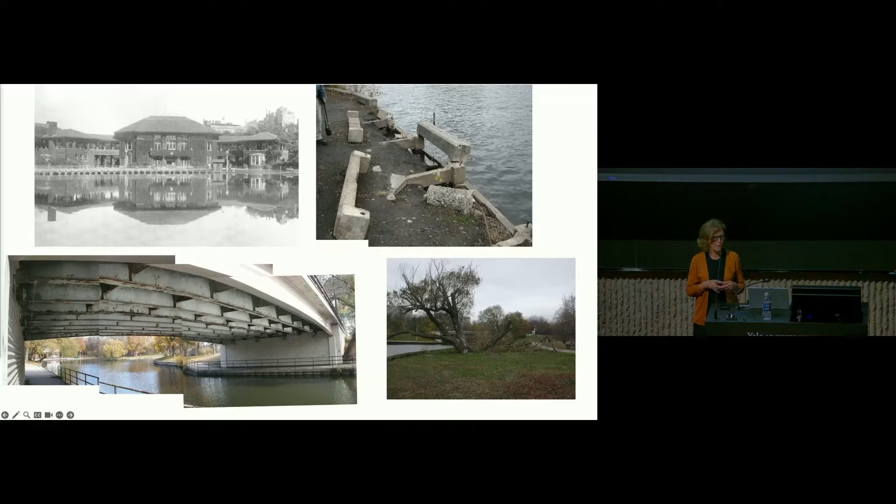This is really part of a zoo with no cages. We really wanted the animals and the people to mix without barriers, just by inviting, by having the right habitats, people will come. So starting out, we have a pond, a remnant of the 19th century, where water is thought of as more of an aesthetic introduction into the city, reflections.

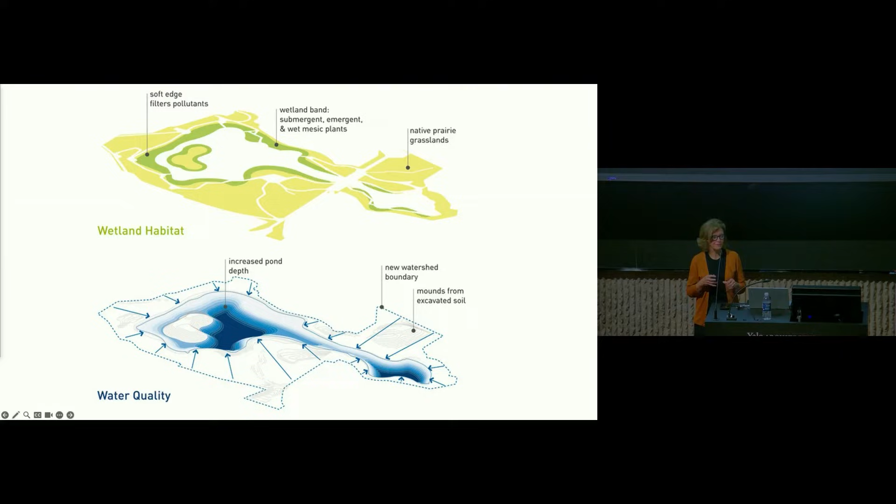And when we came into this project, the zoo had already - it was a bit run down. The project ended up being about making a place, instead of repairing the edges of this pond, really ripping them out and creating a deeper pond that could support life. And so in this project, over time, we've seen a real increase in the amount of biodiversity it has.

Wood as a material was very important to us, to do something that was renewable, and to create urban space. It's like a new overlay on this 19th century urban space that provides new opportunities for using it, for connecting to people. And of course, we did design a pavilion with these bent wood lamellas that houses a lot of different things that we never expected.

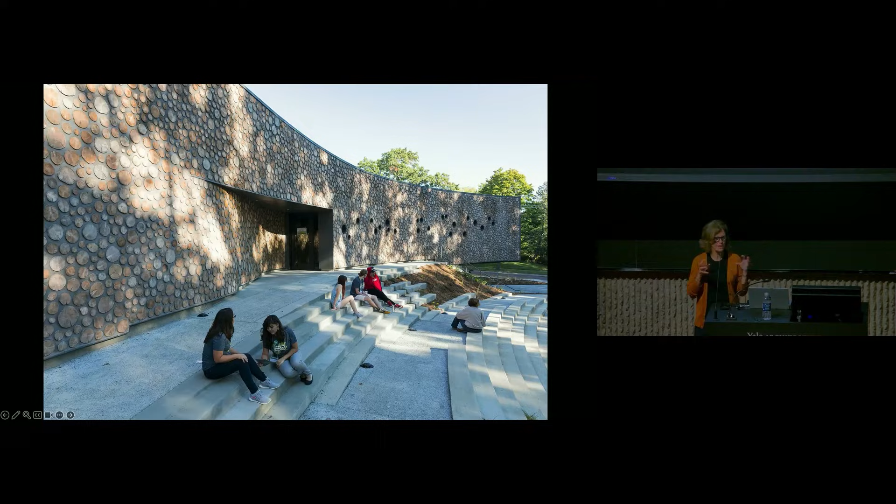So the result is this incredible, almost living wall that's sequestering carbon within the wood. The wood actually is the carbon, in fact. So it's a great way to reduce embodied carbon in this type of building.

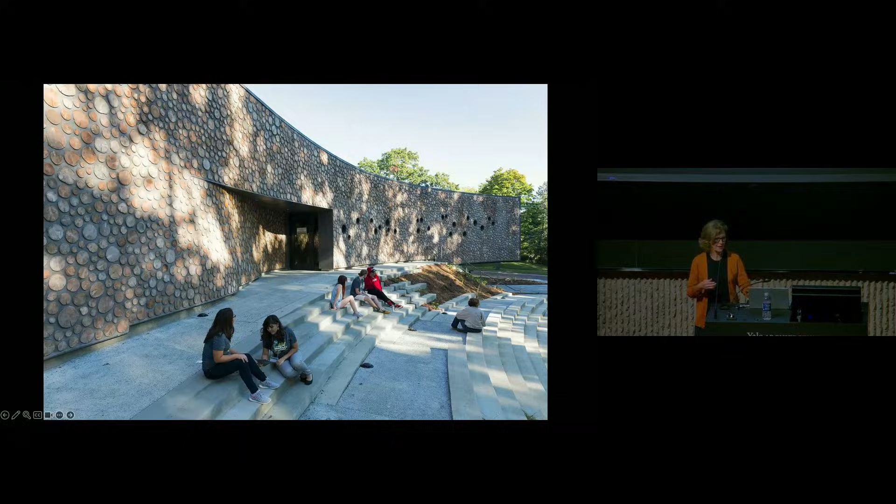Inside it's very light and really feels modern and contemporary, but outside it can also have this aging appearance, a response to the environment, and be a long-lasting building.

The way I started to first think about grafting goes back to 2012 with this project, the Prentice Hospital. It isn't really a project, we were never given the commission to do this. But sometimes as an architect, you just have to do things that you want to do, and you don't have to have a client. That's the example of this.

It dawned on me that we were trying to reuse materials, and it was very hard, like in that Ford Calumet project. It's very hard to get materials that have already been used for one thing and reuse them in a building, because you have to have those things tested. You don't know what's available. There are ways to do it, but it's a chore. But buildings are already there, so they should be easier to reuse.

This building, designed by Bertrand Goldberg in 1975, was a really cool looking hospital in Chicago, with these oval windows, and the design of it is kind of this cloverleaf. And it was going to be torn down. It just seemed like such a waste, because it would just be the coolest building, and it could be anything.

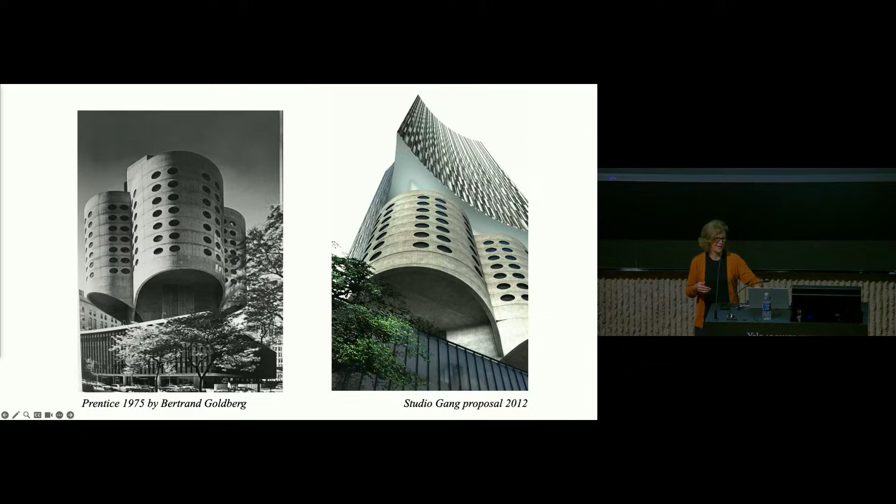It was technically possible to show this, because Bertrand Goldberg, when he designed the building, did not put a core down the middle. That's because it was a hospital, and he believed the nursing staff should be able to see all of the patient rooms. So the nurses' desk was in the middle.

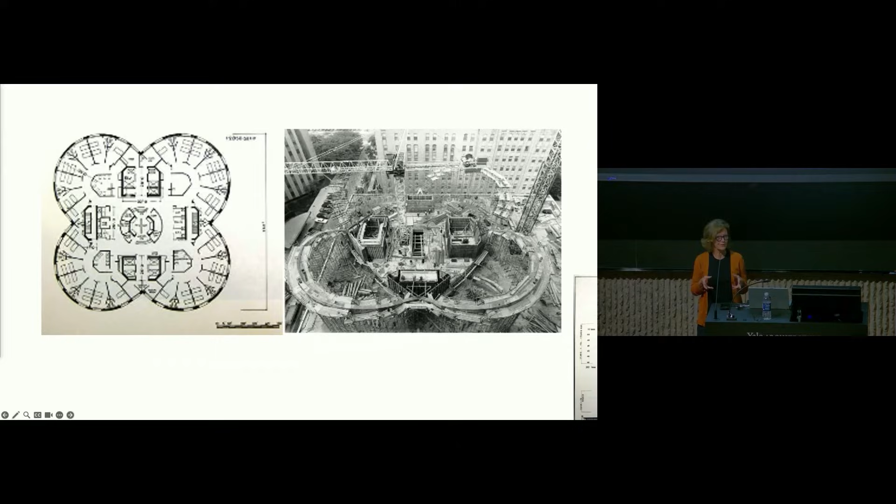But what this did was actually make it possible to imagine dropping a core down the center of this thing. Yes, that's why it's not preservation, because it's not really in keeping with the original use, but it would be a way of adding capacity to the site and keeping the remnant of the Bertrand Goldberg building that so many architects like me loved.

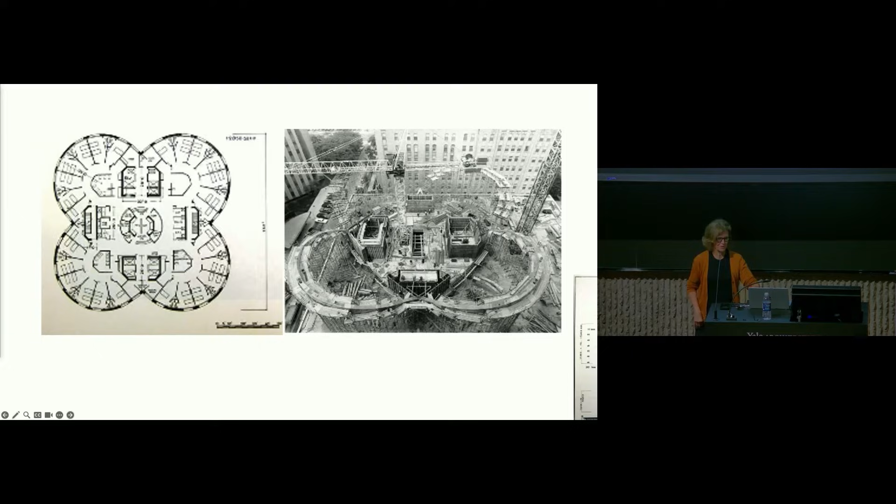But anyway, they got it down and built a glass building over there. However, it did start me thinking more seriously about what reuse is.

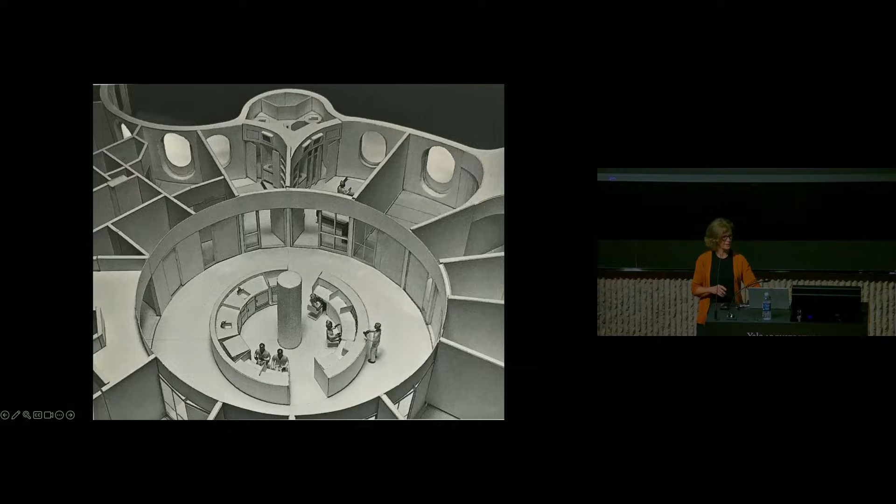Something like design for disassembly might save carbon, but it's not going to save the carbon until that next building comes and gets disassembled. So this is about the emergency of saving carbon right now, so delaying building. But the second best one is increasing the intensity of use. In other words, not just reuse, but amplified reuse: making buildings work 24/7, making buildings have more square footage, making buildings have more uses.

And so this led eventually to this book, which talks about the art of architectural grafting. And why grafting, why horticulture as an inspiration? It's an incredible thing. I've always been interested in plants, but grafting has been around for so long. It's an ancient technique where there's a rootstock and you add onto it this scion, which brings new qualities to the plant. It's not about sexual reproduction, it's making the two plants work together as one, but they stay independent plants, which is really interesting and made me think of how we as architects might add on to buildings.

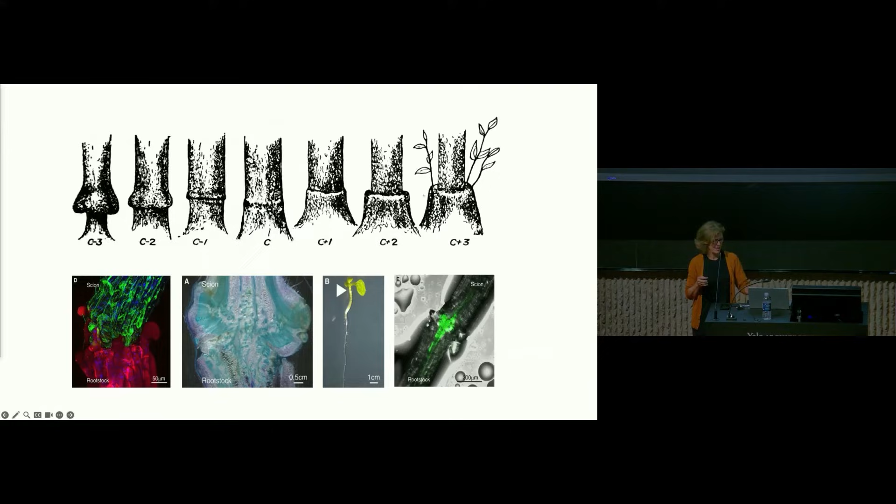This is the kind of stuff that was inspiring me to run a couple of studios on grafting. We've actually done grafting in these studios with plants, and it's interesting to see the other aspect of it, which is the care it takes to actually get the plant to survive and live. It's not that easy, so it's very interesting to see which students care for their plant and which students just kind of put it on the desk and let it die.

But what is architectural grafting, really? I'm trying to evoke a philosophy about upcycling buildings, making them have more capacity, taking old structures, which would be the rootstock, and bringing new life to them that brings an advantage to both, creating a new, distinctive type of architecture.

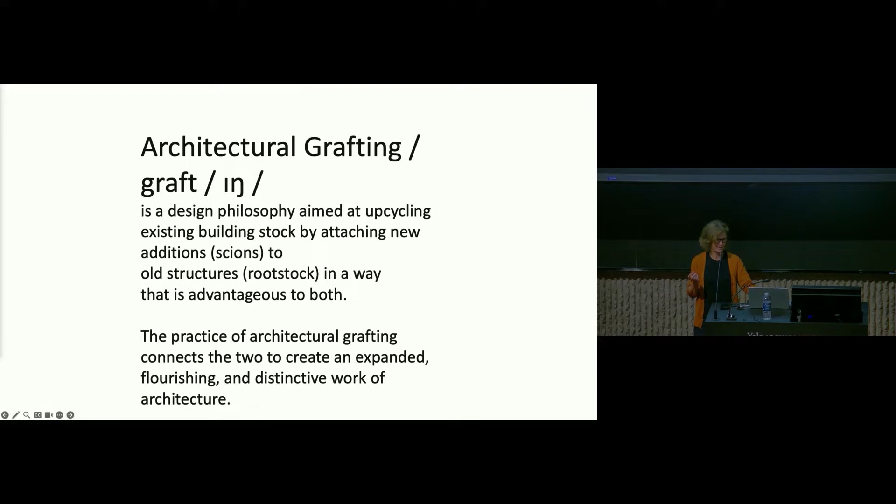In the book, I tried to put out some rules, to be added to or shot down, just some qualities of what good grafting is. You can't just graft anything to anything and expect it to work. There was a lot of fear about grafting in the past because people thought it was impure, but you do have to find things that are compatible for it to work.

That's also interesting—just tectonically, let's talk about that for a second. There's a physical connection that has to be made. I was experimenting with this very banal building we were given as a project. There were about 6 of these buildings on this campus, and they wanted to turn this one into a lab, but it was kind of just a storage building. So you really have to start out assessing what you have.

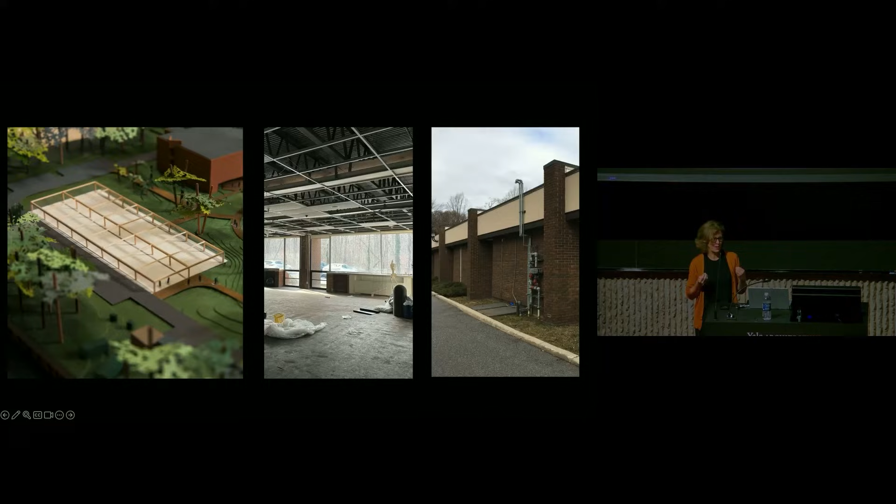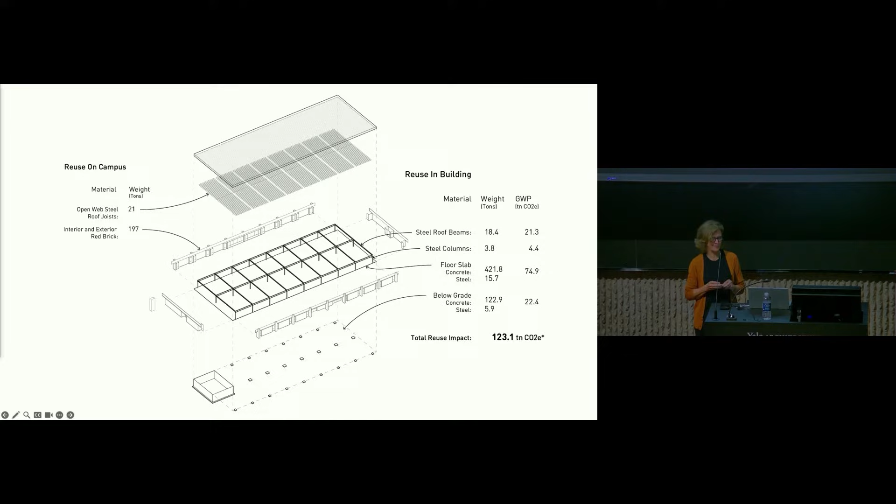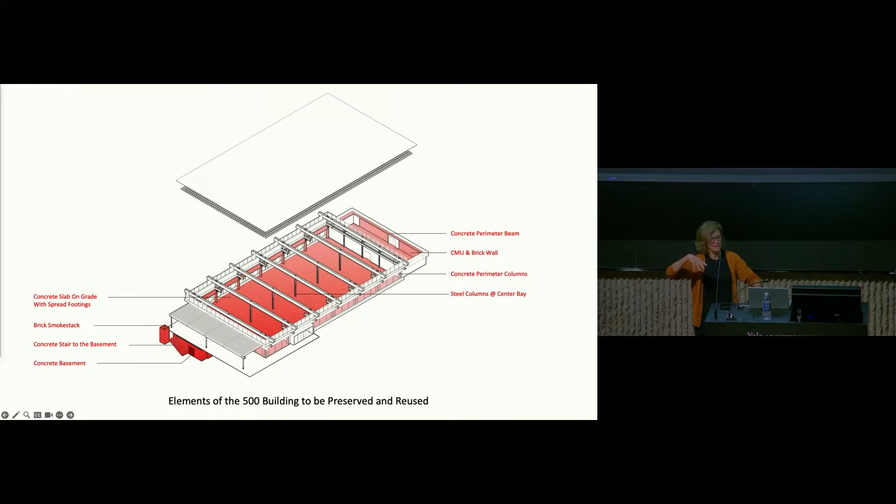Start with what's there. Really understand what can be reused. Most of the carbon, of course, is in the structure, so oftentimes you can pull something back to the structure and you're still saving a lot of carbon—just use that as a starting point. You do have to quantify and assess what will be reused. In this case, we were turning it into a lab and needed a higher ceiling for all the exhaust, but also to bring in some natural light.

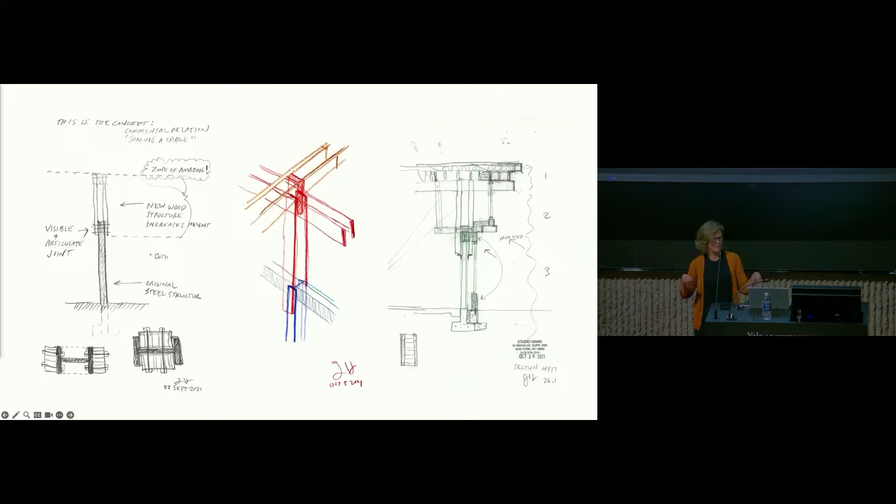So working on this idea of the saddle graft, which is where you cut the living plant almost like a clothespin, and you put them together like that. So that was our concept of how to add on to this anonymous structure.

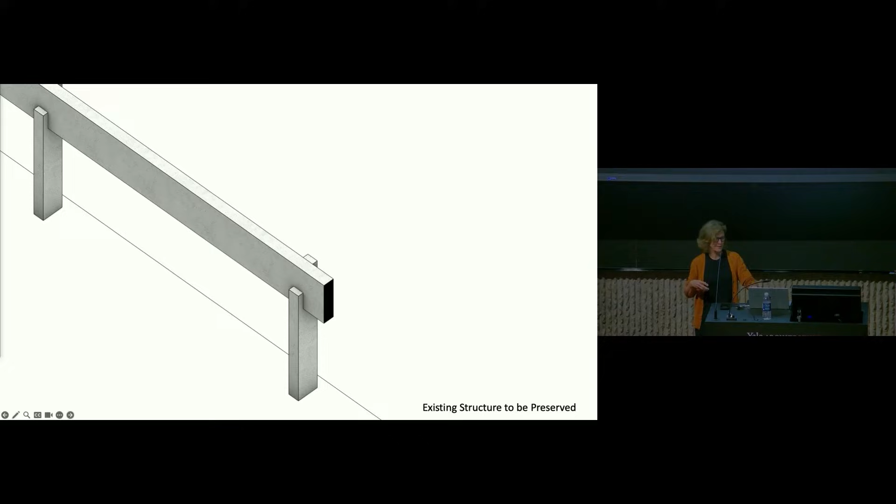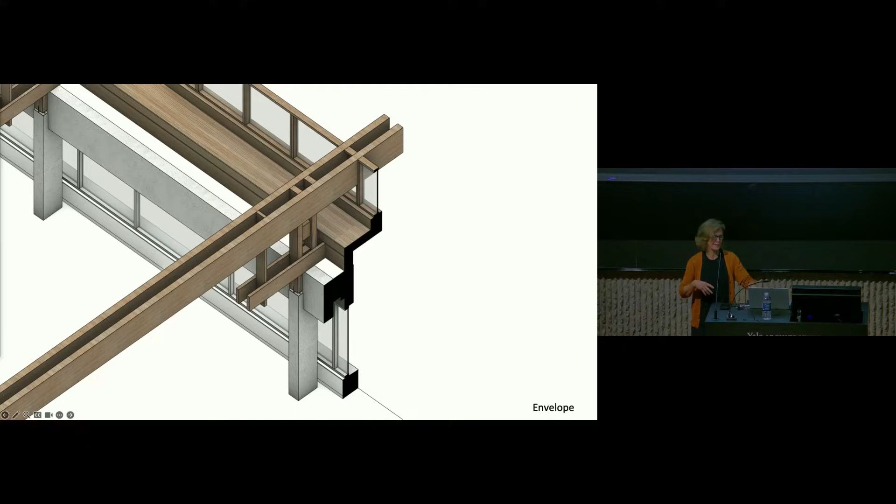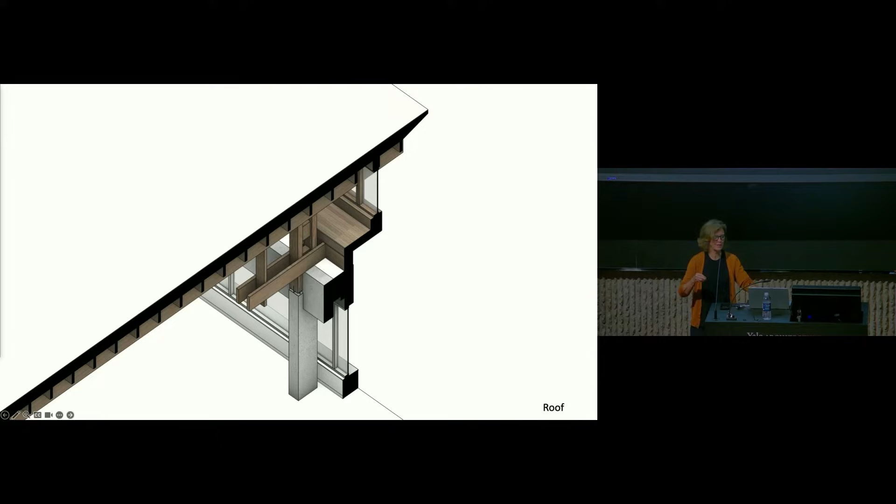Basically starting with the existing columns and beams that were there and bridging up with the saddle, building onto it with wood, which also has lower carbon, creating an assembly that helps create this new, higher plane of the building, making possible this higher and better use, upcycling it. These beams are cantilevered off the existing column lines and beams, like a beamlet.

So together it ends up being this interesting connection, stabilized through the saddle graft. And then inside it would look like this, with a much higher ceiling, and outside a new aesthetic. It doesn't look like the old one, but it's based on it, so it's somehow connected to it, and creates a new piece of architecture.

Another category we had been working on is post-industrial, reusing big old industrial buildings and bringing them back into the urban environment. At Beloit College, we had the chance to work with an old, formerly coal-burning power plant that is positioned right in between the town and gown.

It was a powerhouse that was built over the years in different stages, and then we connected it via this bridge to the campus, making it almost like an accessibility machine to bring people down to the riverfront.

Inside you have this old boiler room and turbine hall, a building so much bigger than you would ever be able to build from scratch. So it has all these great qualities, and we put into it classrooms and recreational spaces like this new practice area, a track that pokes into that, and a pool.

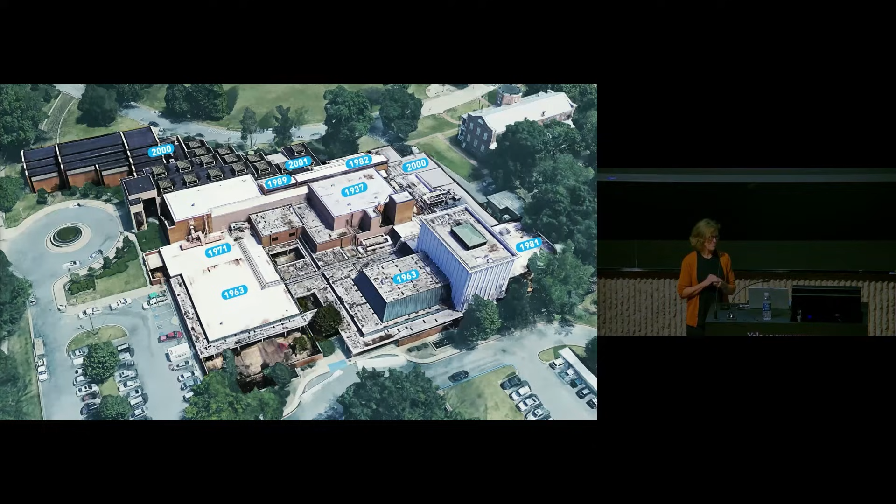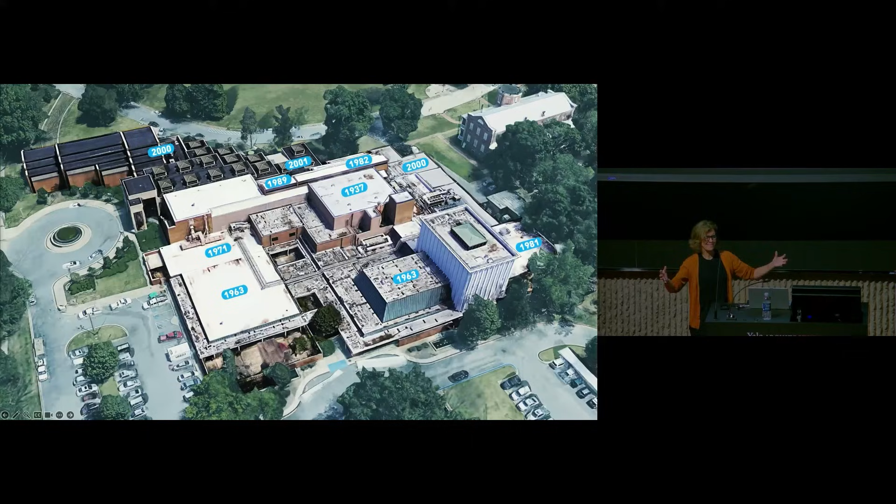This building had all these different parts, and the original building was here in the middle, from 1937. They had just built right on the front of it, every possible shape, every possible material. There were something like 8 different structural systems, 8 different mechanical systems, and the art path was often crossing over the public path.

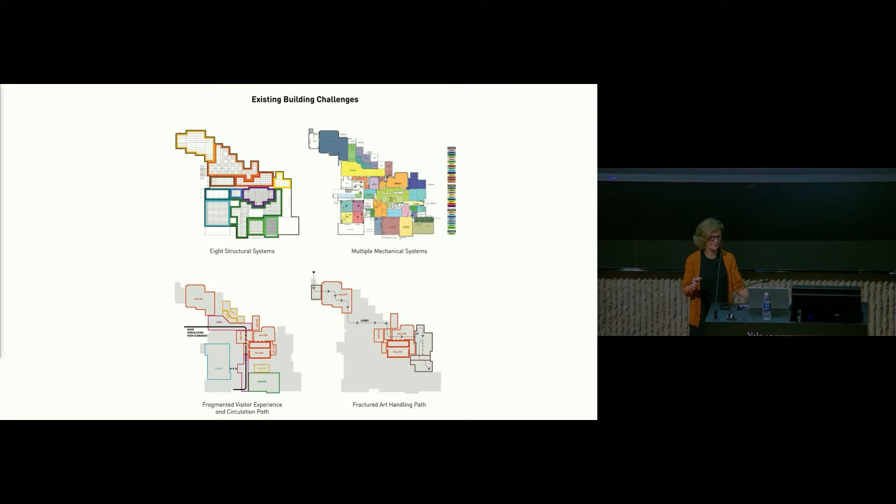So sometimes it takes some scraping away or some editing. The point is you want to give more life. Just like grafting in plants, the goal is the life. So if it has to bust out of what was there, you have to do it.

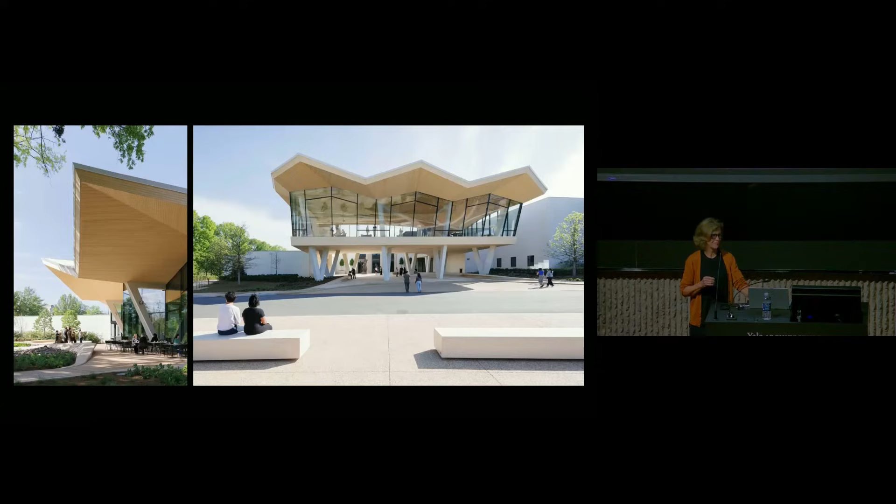At the same time, restoring and scraping away the buildings that were glommed onto the original front building, bringing that in to become the entry once again. And here is the back, where it just blossoms out into the park and creates a lot more types of uses and engages with the park.

There's a little bit of a transformation you can see with those.

This building was completed right as construction went all the way through COVID and opened up afterwards. People were so excited to go to a new place. This is the cultural living room, a place for people to talk about what they've seen.

They just didn't have the social spaces that they needed for people to connect. There's an axis where all of the different programs can now be connected through the blossom, as we called it, and a lot more sight lines between people, and between people on the outside and people in the different programs.

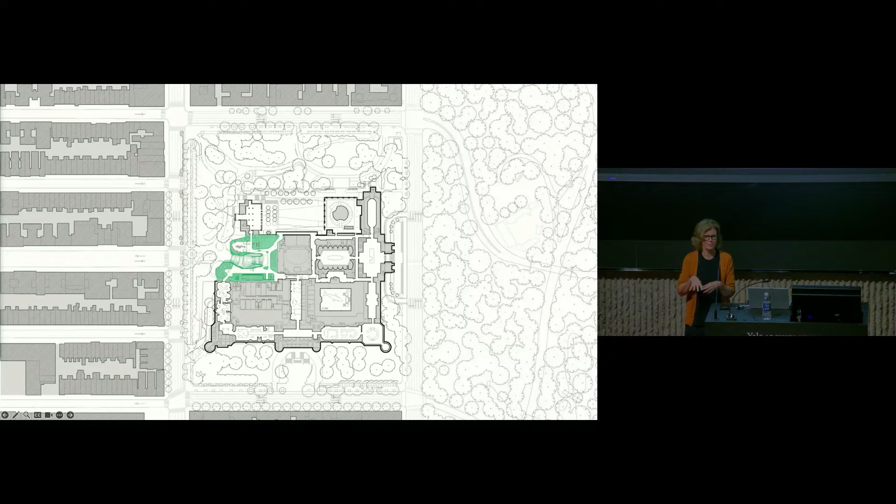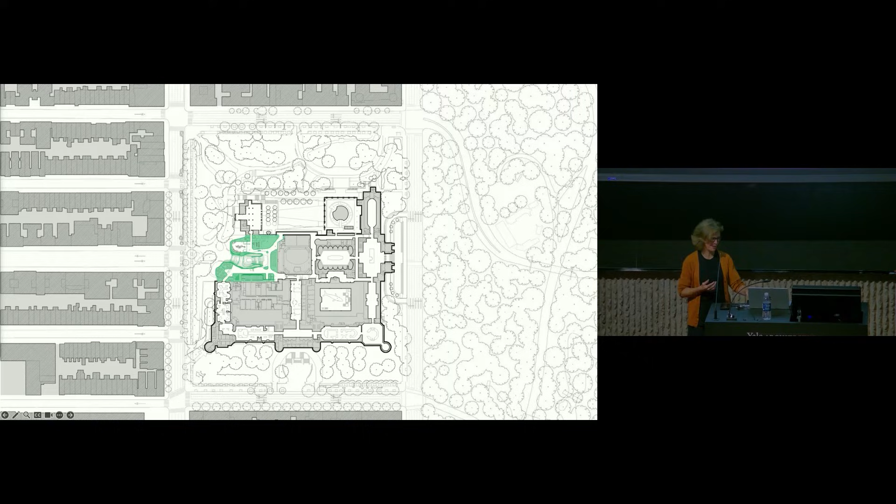We were building, because of putting it here, right on top of the loading dock and loading zone for the entire museum. They have—I don't know if you've ever seen the big whale—and they have lots of big festivals, events, and galas, as well as big giant dinosaurs coming through below. So you could only put columns down in certain areas.

So that inspired this idea of making an inside architecture, something that's a solid and a structure that would support the floors coming in, framing into it. It's hard to describe this project—it is a structure inside that then supports the building all around it.

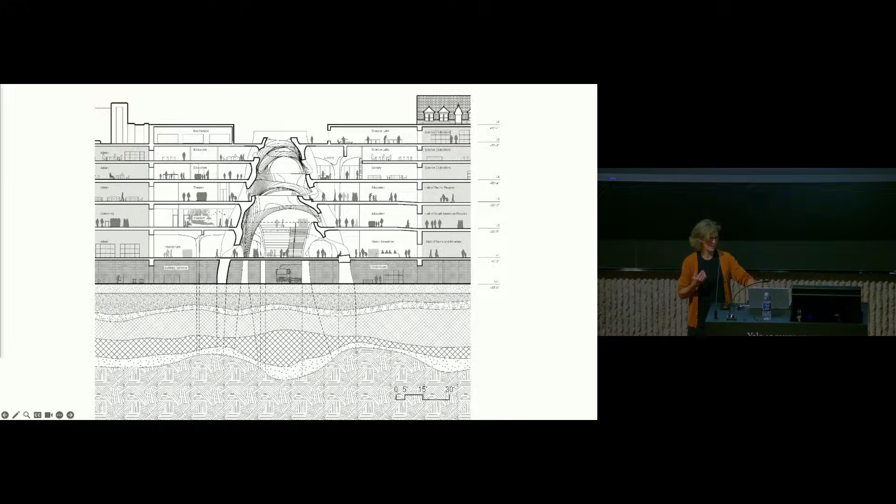Because of these constraints, it really brought to mind these landscapes of discovery—these places where the material, the mass, has been eroded or subtracted, leaving fewer points to land. If you were to look at it as a drawing, this is the kernel of the project.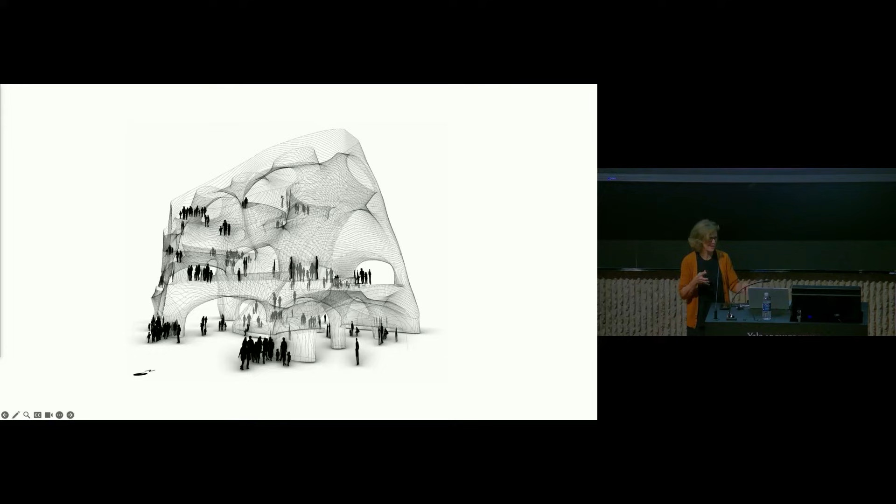This is the architecture—you'll never see it like that, but it's inside the building. This is some of the modeling. We had to come up with a lot of interesting ways of modeling this building, and a lot of the software we tried to use was creating too blobby of shapes and things like that.

So it is also about the form. The creases were important. The aesthetics of it, as well as the technical side, were very important to get this discovery.

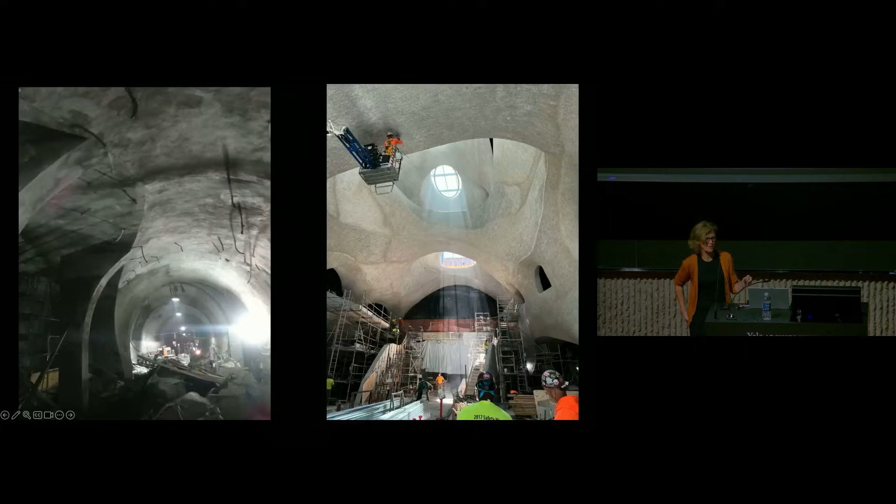And then it became, how do you build it? On the left is an image of this tour we did of the underground in Manhattan. You can see it's almost like a cathedral under there, with these vaults and stuff where the trains go through. It's all made with shotcrete.

In other words, they put the rebar in, and then teams go through and shoot the concrete into the rebar, and scrape it into the rebar. So it's interesting, for someone who loves making stuff, to have a process that is both digital, at the highest end of that technology, but also handmade in a certain way.

And so it's really not like the parametric things from the 2000s—it's really much more about the physical making of the space. The other interesting thing is you don't get to see what you did until the end, because the whole thing is full of scaffolding.

And the only time we started to see it is when you start to pull it down, even though every inch was scanned with, to make sure the rebar's in the right place, but you're only seeing a little portion of it at a time. So it's very exciting to see this building, and also seeing it from the top down instead of the bottom up was a lot of interesting inversions there.

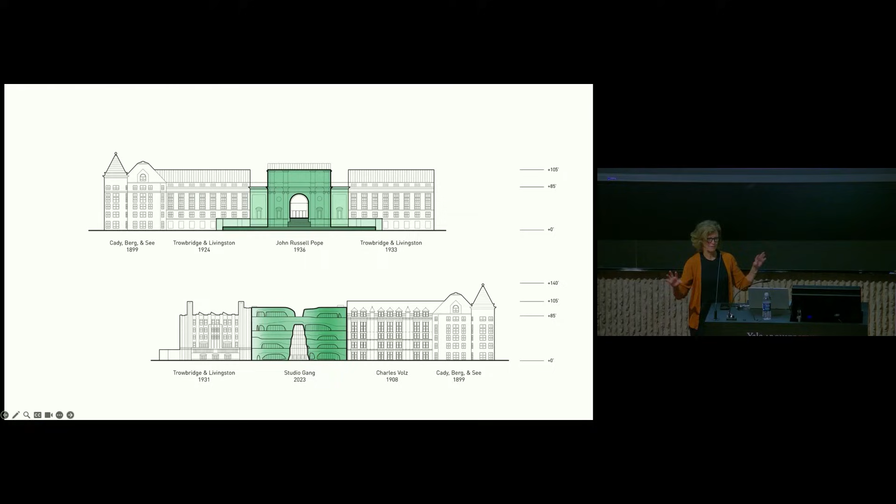There's also many other materials, but we decided to associate our extension with that piece. So from the east and from the west, you have this Milford pink granite, and you have this kind of arched entryway.

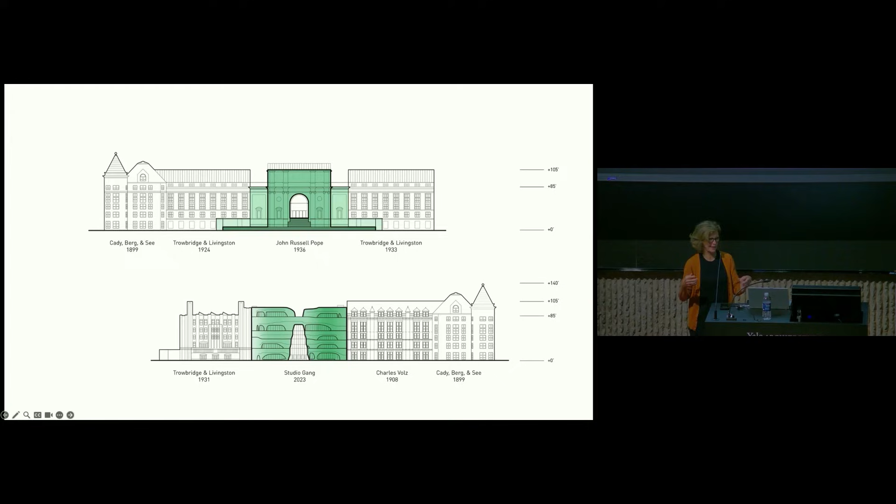And so that's the outside of it, which was shotcrete through and through, and then we have, because it's exterior, we have insulation and then granite, this granite cladding to connect it to the rest of the campus.

Okay, all right. So last project, another aspect of grafting, I want to talk about asynchronous collaboration.

I think we're often taught that we are the authors. If you're in school, it's like, what is your project about? And that's really important. But there could be a way of creating that is much more about this kind of co-authorship and making moves that are informed by the others.

And then when it's working on something where someone's already passed away, another architect, then you have to kind of guess what they would have done. And that's what I do. I try to think of a dialogue with the last architect.

And that's just an interesting way that this grafting brought up, because with grafting in plants, you have to work with the qualities of the plant you have. You can't just get rid of it. So you have to kind of go with it.

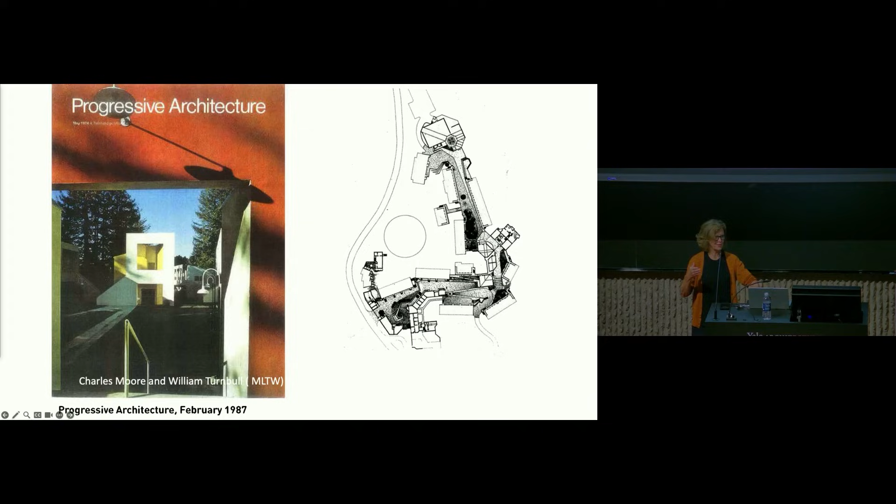at University of California. They have a series of colleges, and he wanted to make this experience almost like a street from a hill town in Italy in a redwood forest. It was really interesting. It was done, and I think he was working on it in the 70s, but it was published in 1987. It kind of has this elbow-like plan.

And here's some of what he called trivial monuments, but he had these very quirky things that were, like a mayor's stand and a phone booth and the laundry and a piazzetta and lots of little things that were dotted through there to bring focus to the streetscape that he was creating.

So all the inside of the buildings were white, and then the outside, the whole environment facing the redwoods was painted. It's all stucco, but it was painted like a paprika kind of color. And so this is looking at the way it was when we first visited the site.

So you had this housing with galleries that led to the different units. Part of this project was renovating these, which we worked with another architect to figure out, because they had mold and there were some things about it the students didn't like. So we had to improve and work on those, but we also had to add hundreds of beds to the site.

One thing about Charles Moore that I started to appreciate was that he was really into this engagement with the community where he was building. There was a radio or TV program where people were sending in their ideas and writing them down.

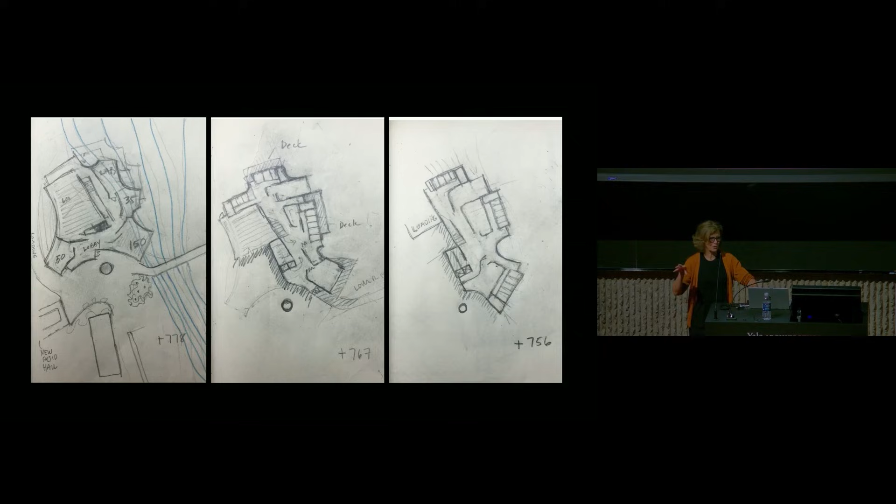And all of this is again bio-based materials, all wood construction. I even used stucco, which I had never used before, but it was kind of fun because you can do curves very easily. All of these connections to the redwood forest were amazing to do in these different classrooms and auditoria, as well as using the wood itself as the cladding material on the residence halls.

I want to also mention, I'm always trying to find ways to reduce bird mortality with windows. Here we were able to use a frit that has all the different characters of the forest as the frit identity. So it's pretty nice to have that.

So just to wrap up, coming back to the Midwest—one of the things again is trying to think of these in terms of systems and not just objects. The Midwest, of course, is a post-industrial landscape. I'm passionate about the Great Lakes—it's like 20% of all fresh water found there—but it's also seriously polluted from that industrial era.

As I started thinking through how we get the wood or biomaterials we need to do grafting, but also to reduce carbon, I started thinking about forests to replace this. So that's what I've been working on lately—partnering with different groups to think about installing productive forestry in place of polluted landscapes.

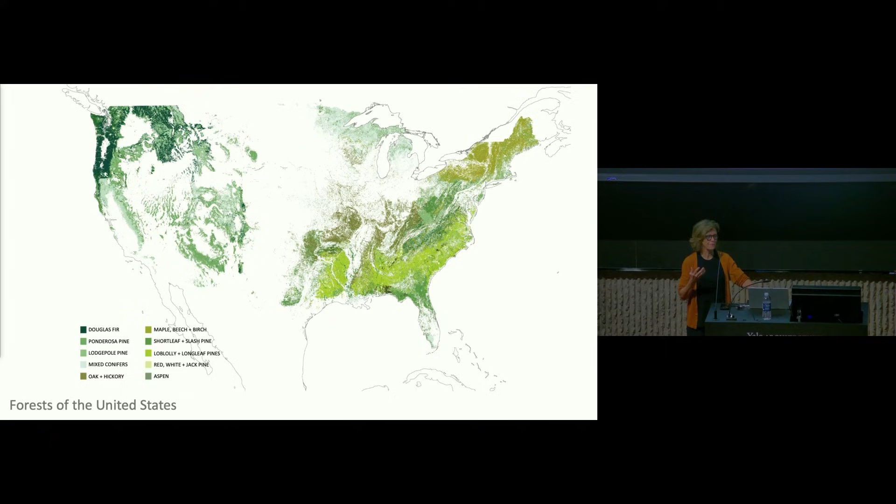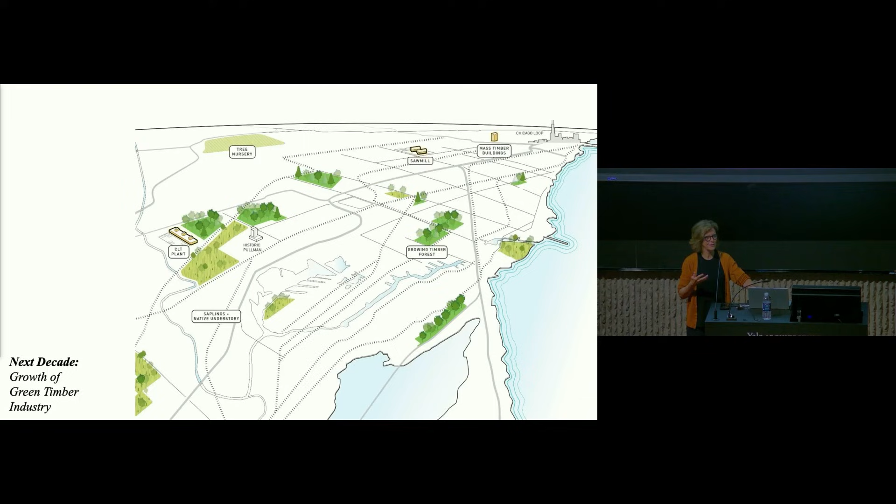When you think about what could happen—if you look at this map, this is all of the forests we use today for our domestic lumber, and forest is a very generic word for something with so many different types and varieties. But if we think about replacing some of the polluted landscapes, these brownfields, with forests, you can imagine starting a whole new industry with jobs and livelihoods that would start to replace some of that industrial loss.

And with that, 45 minutes on the dot. Thank you very much.